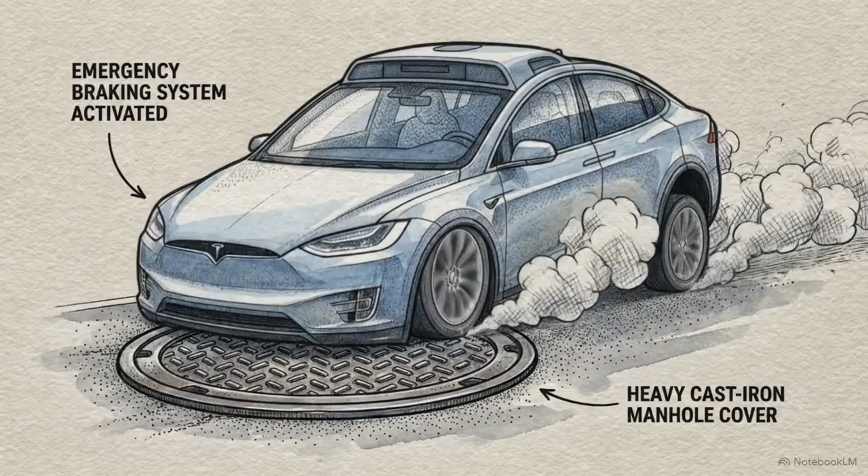An autonomous vehicle cruises down an empty road. Suddenly, it slams into an emergency stop. The detected threat? A perfectly flat, safe metal manhole cover.

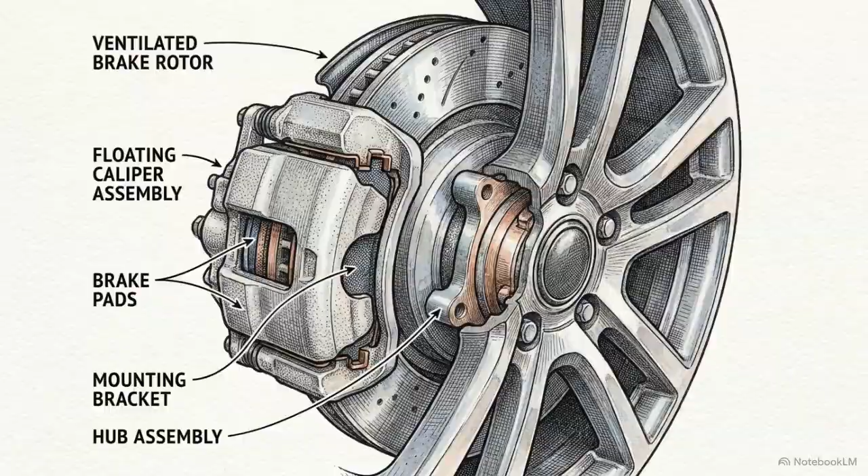To understand why this happens, we have to look past standard mechanical failures. The vehicle's brakes didn't lock up, the onboard computers didn't crash. The algorithms processing the sensor data and the software actuating the brakes executed their compiled instructions exactly as programmed. Even the radar sensor itself worked flawlessly, transmitting and receiving radio waves in strict accordance with the fundamental laws of physics.

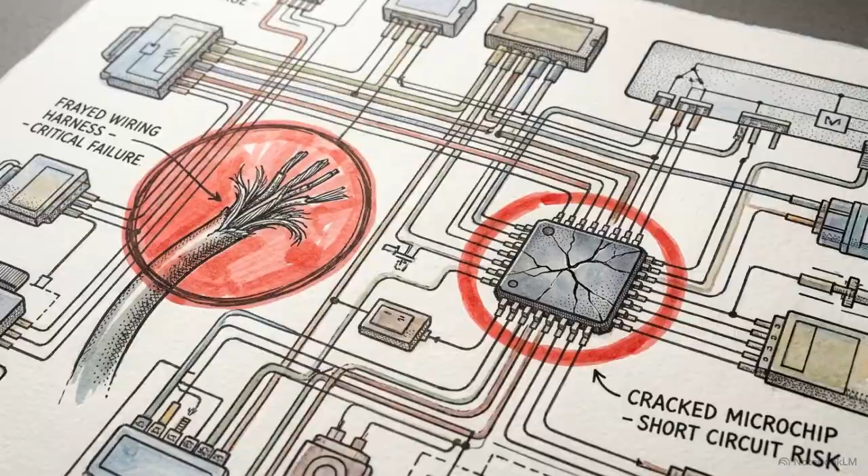For decades, automotive engineers relied on the ISO 26262 functional safety standard. That framework is designed to hunt down broken hardware, degraded wiring, and software bugs. But ISO 26262 cannot account for this manhole anomaly.

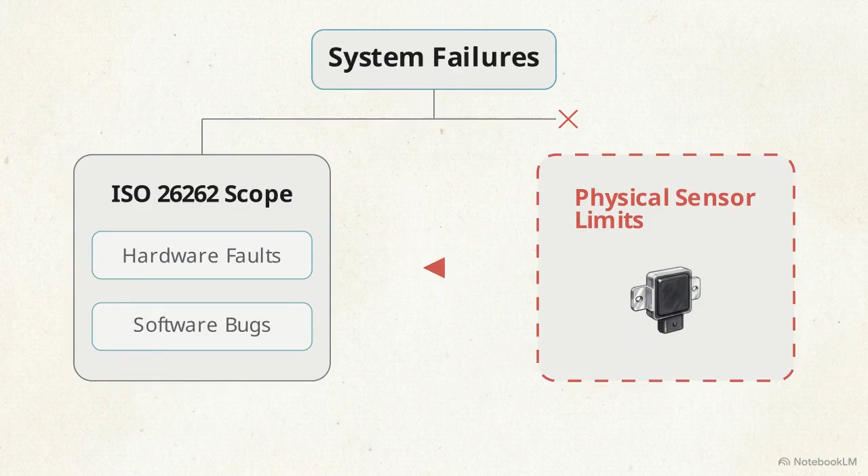It has no mechanism for handling a situation where a sensor operates perfectly, with zero faults, but is pushed to its absolute physical limits. Autonomous systems require us to confront a difficult reality. Flawless component execution can still yield hazardous behavior.

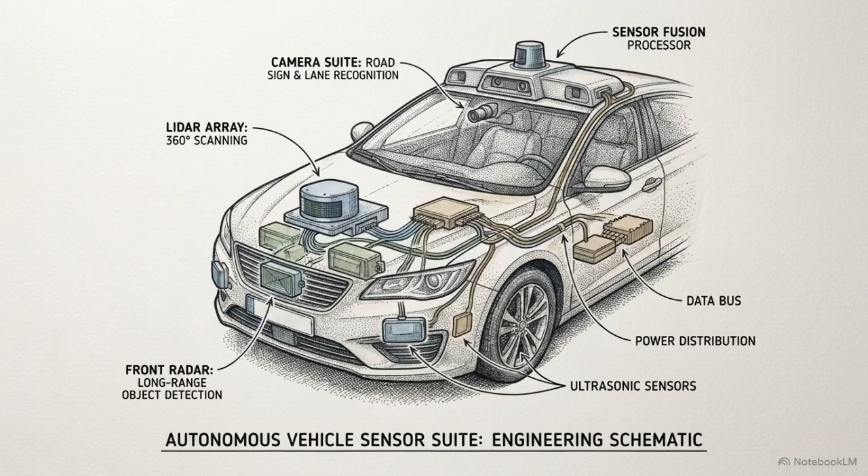This specific vulnerability is why the industry developed ISO 21448, commonly known as SOTIF, the safety of the intended functionality. It addresses hazards that occur without a localized component failure.

SOTIF operates on a specific mapping objective. It forces engineers to actively search the operational environment for unknown unsafe edge cases and shift them into the known safe domain. The mathematical bridge for this shift is Clause 7, specifically the acceptability evaluations in 7.4 and the documented work products in 7.5. These clauses translate abstract environmental variables, like heavy rain and metal manholes, into strictly quantitative validation parameters.

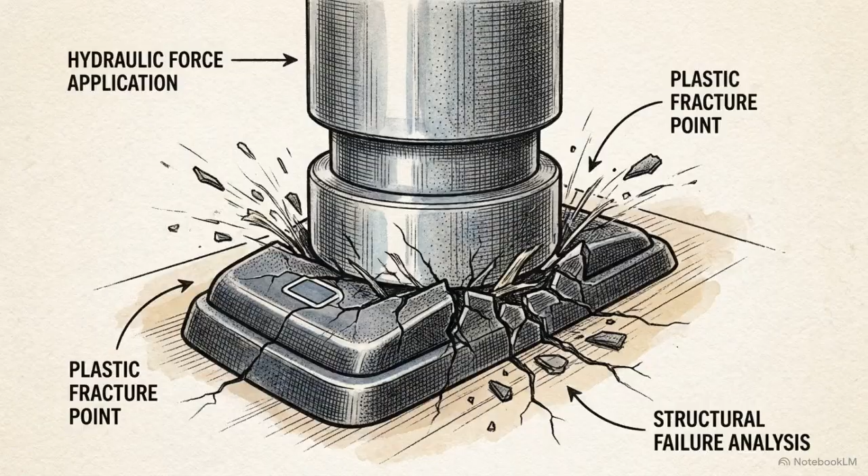While legacy workflows focus on how long a component will last before breaking, SOTIF requires engineers to predict exactly how a functioning system will misinterpret a complex environment.

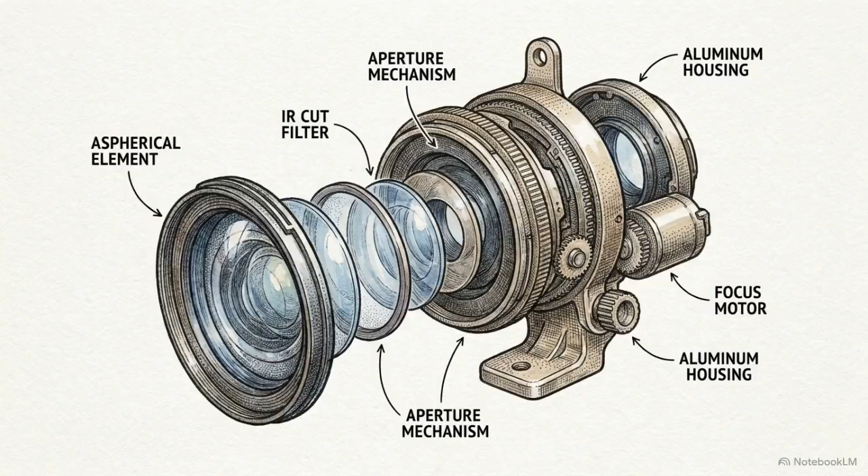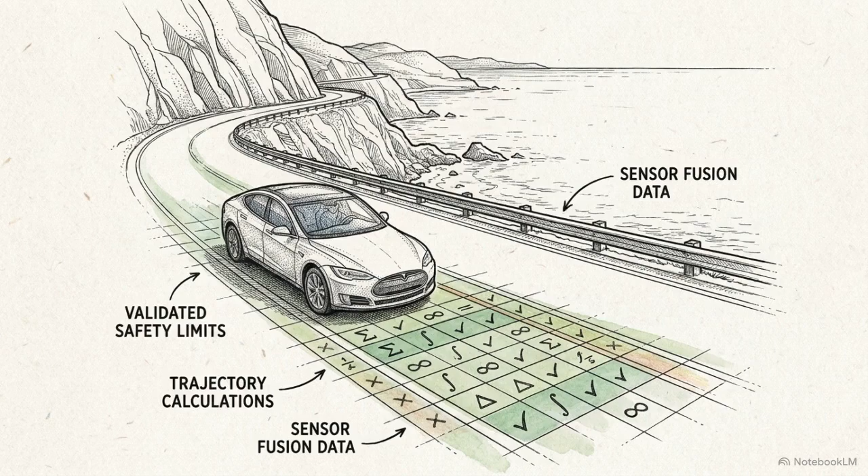The method is rigorous. You isolate the physical sensor limit, define the exact environmental trigger, and calculate the statistical probability. SOTIF uses mathematical logic to validate when inherent physical sensor limitations are safe enough for deployment.

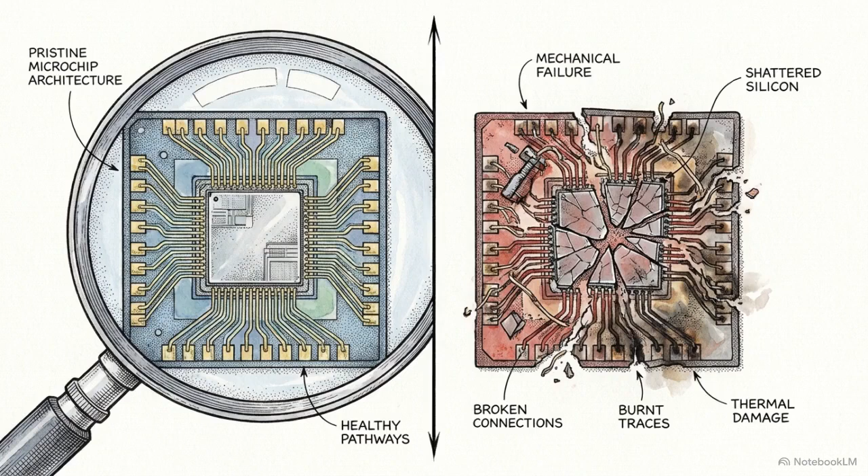Under Clause 7.3.4, SOTIF defines these physical limitations as functional insufficiencies. This is distinct from a software bug or hardware degradation. A functional insufficiency is simply an immutable limitation of the technology itself, strictly dictated by the laws of physics.

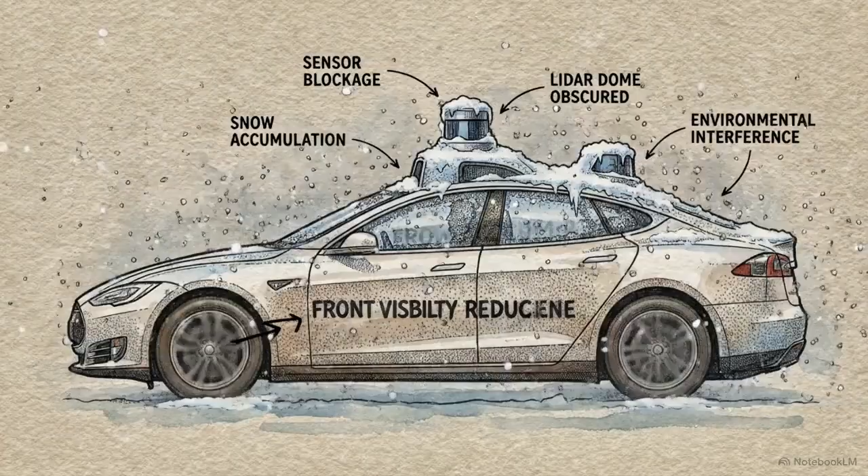Take the radar sensor as our anchor example. Radar is vulnerable to multipath propagation when interacting with metallic objects. The sensor emits a radio pulse, but instead of bouncing straight back, the wave reflects off the asphalt, strikes a metal manhole, deflects into the vehicle's undercarriage, and finally returns to the receiver.

Because the radar calculates distance based on the time of flight, this multi-bounce delay forces the algorithm to generate a false distance metric. The code does exactly what it's supposed to do, but it projects a solid ghost target directly in the vehicle's path. Every sensor modality has these physical constraints.

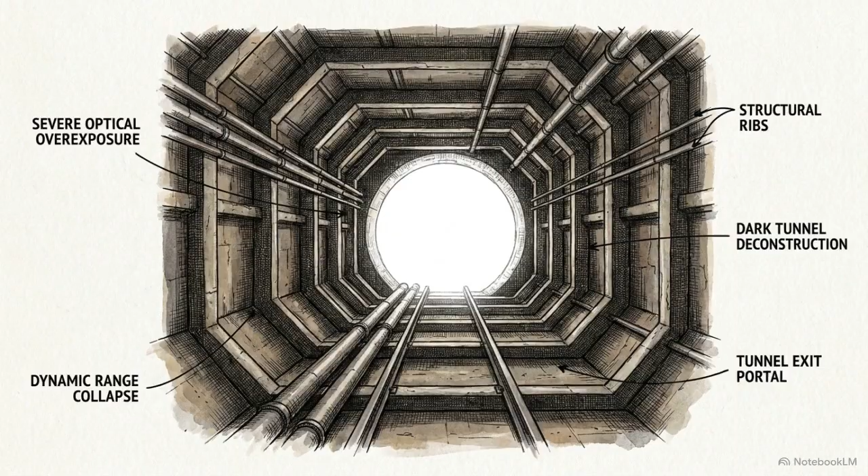While radar struggles with multipath reflections, a camera's optical dynamic range will collapse when transitioning from a dark tunnel into bright sunlight. But the insufficiency is only one half of the equation.

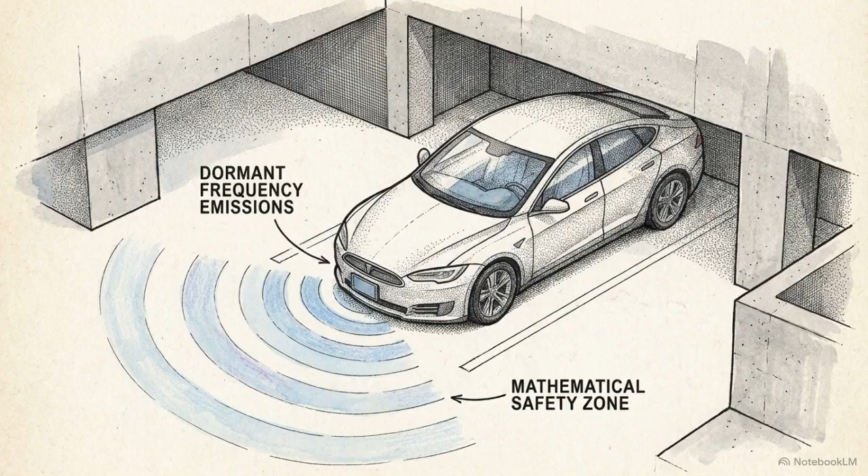The second variable is the triggering condition waiting out in the operational environment. A functional insufficiency is dormant and mathematically harmless until it is activated by its specific environmental trigger. Only when the radar's multipath vulnerability aligns with the physical layout of the flat metal manhole does the system generate the hazardous ghost braking event.

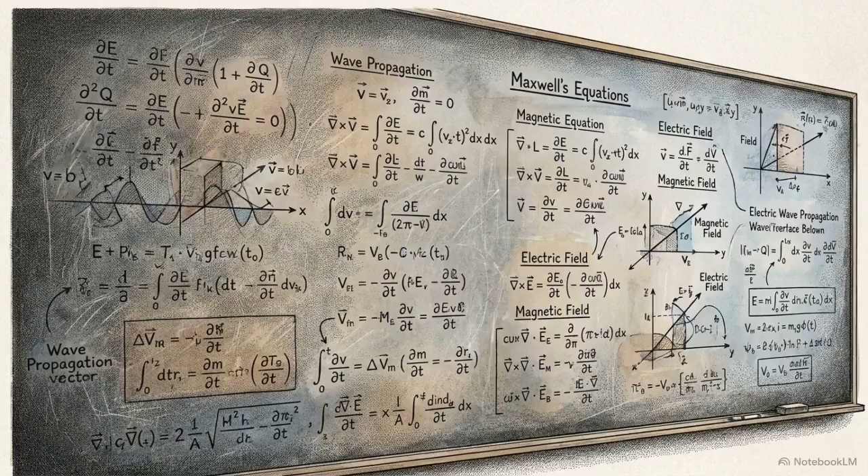Engineers cannot alter the laws of electromagnetic propagation. The physics dictates that these false positives are mathematically certain to occur over the life of a fleet.

Engineers measure this probability by calculating the residual risk. They evaluate three precise factors: the severity of the hazard, the controllability for the human driver, and the exposure, the frequency at which the vehicle will encounter that specific trigger in the real world.

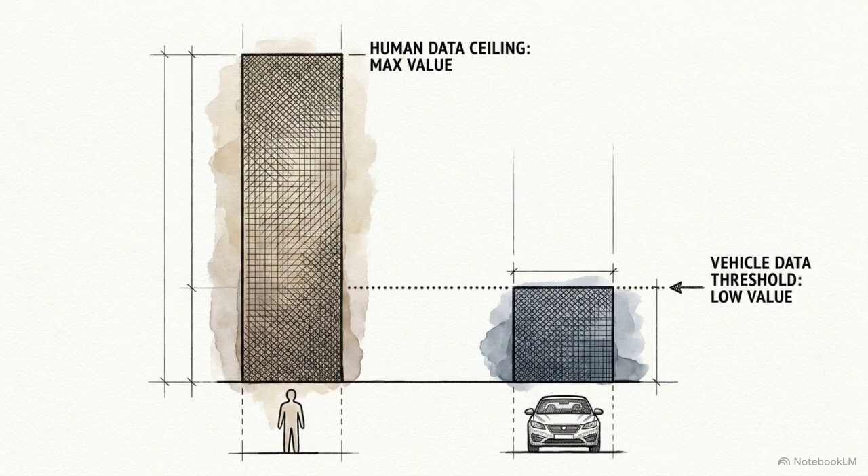To determine if that resulting risk calculation is acceptable, ISO 21448 utilizes global safety benchmarking frameworks. A primary metric is the minimum endogenous mortality, or MEM. MEM establishes a hard mathematical ceiling, demanding that fatalities induced by the technological system fall well below the natural mortality rate threshold of society, typically quantified as less than 10 to the negative fifth deaths per person per year.

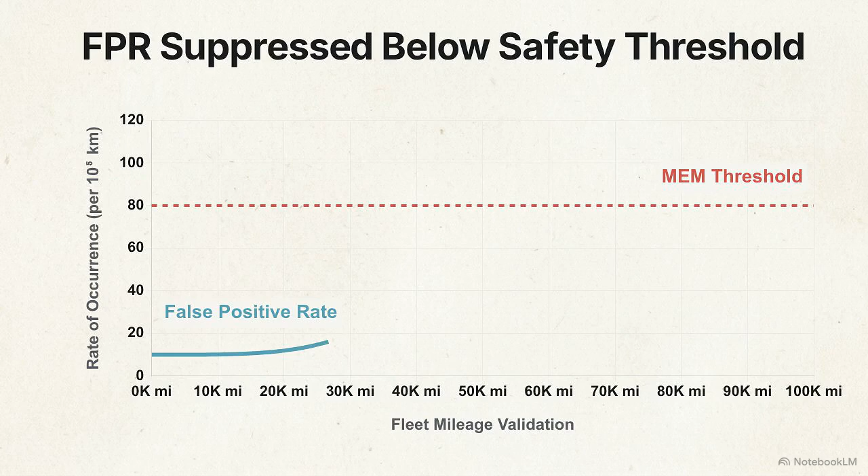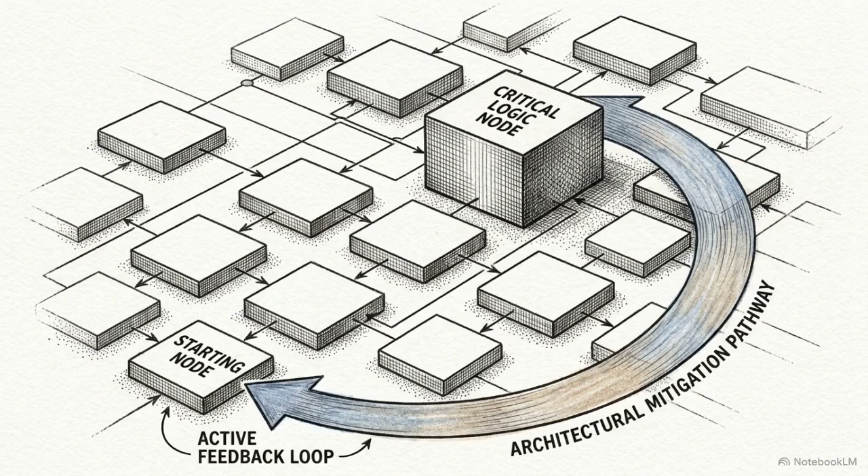The engineering objective is to suppress the false positive rate below the MEM threshold through rigorous statistical tracking. If the calculated residual risk of a manhole braking scenario exceeds that acceptable target, the system architecture itself must be changed, initiating the mitigation loop defined in Clause 8.

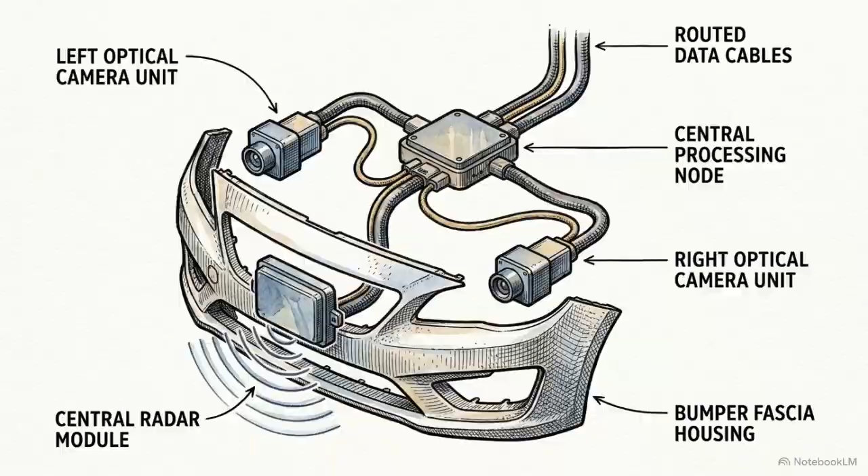Rather than attempting to redesign the radar physics, engineers implement architectural mitigations. They might mandate camera sensor fusion, requiring optical cross-verification of all radar targets before the braking code is allowed to actuate. Clause 7.4 transforms an unfixable physical error from an engineering dead end into a mathematically bounded risk variable.

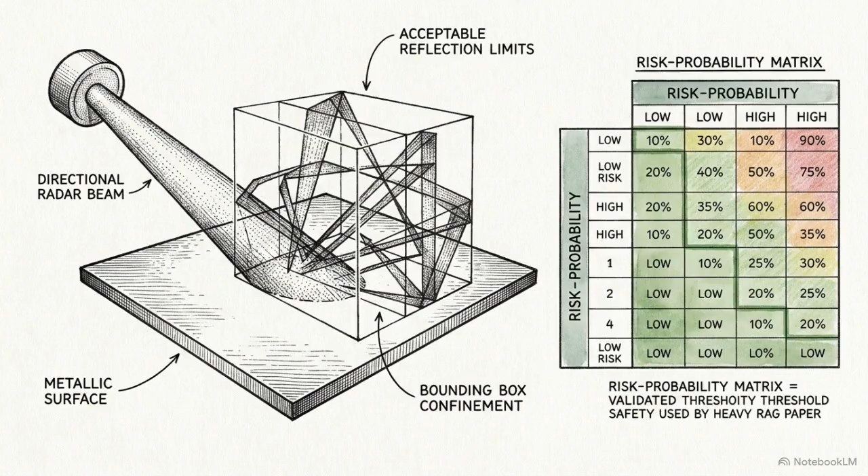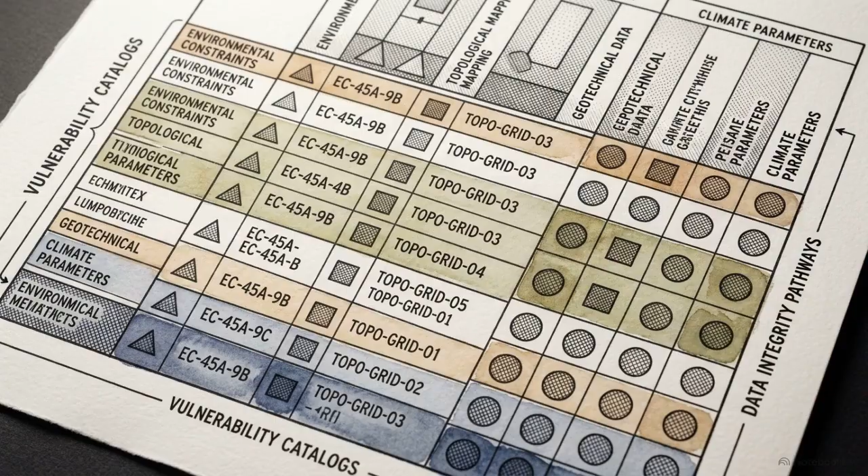The framework of Clause 7.4 is formalized into rigid, quantitative work product matrices in Clause 7.5. These matrices serve as proactive engineering specification sheets. This table, the Clause 7.5.1 database, catalogs every identified functional insufficiency directly alongside its environmental trigger. It records precise parameters, mapping out vulnerabilities like a metal sign positioned at a height of 4.5 meters at a distance of 50 meters. These exact environmental measurements define the physical boundaries of the vehicle's operational design domain.

Next is the Clause 7.5.2 Acceptability Evaluation Report. This document pairs each physical insufficiency with its required probabilistic safety threshold, linking a radar multipath anomaly to a target rate of less than 10 to the negative 7th per hour. That specific matrix row locks in the formal, quantitative pass or fail criteria for the entire autonomous platform.

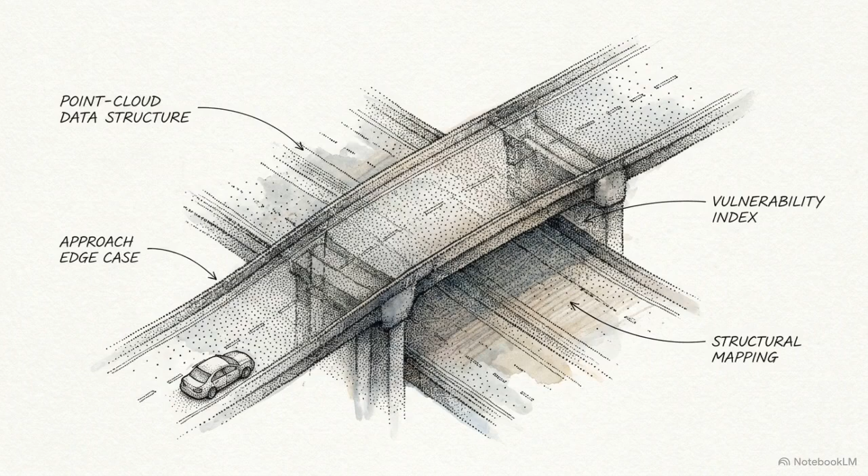These matrices map out exactly which specific edge cases the system is most vulnerable to in the real world. By doing so, they remove subjective engineering opinions regarding what feels safe, replacing them with statistical absolutes. Clause 7.5 matrices represent the exact mathematical threshold where a system transitions from an unacceptable danger to a road-legal product.

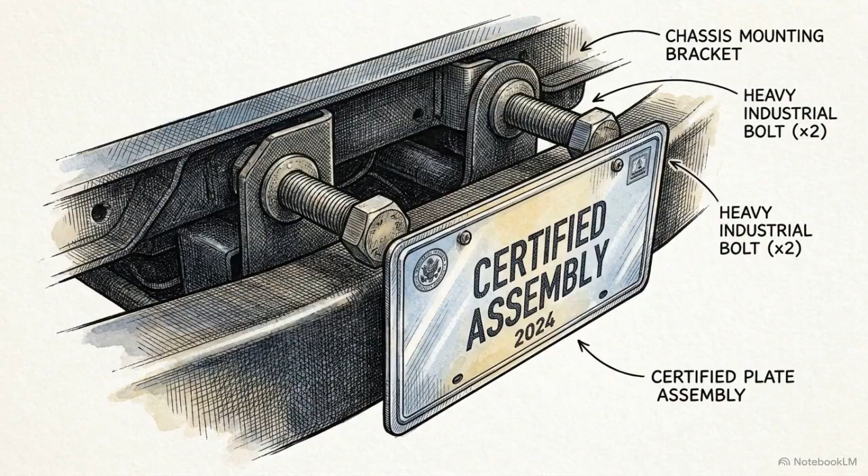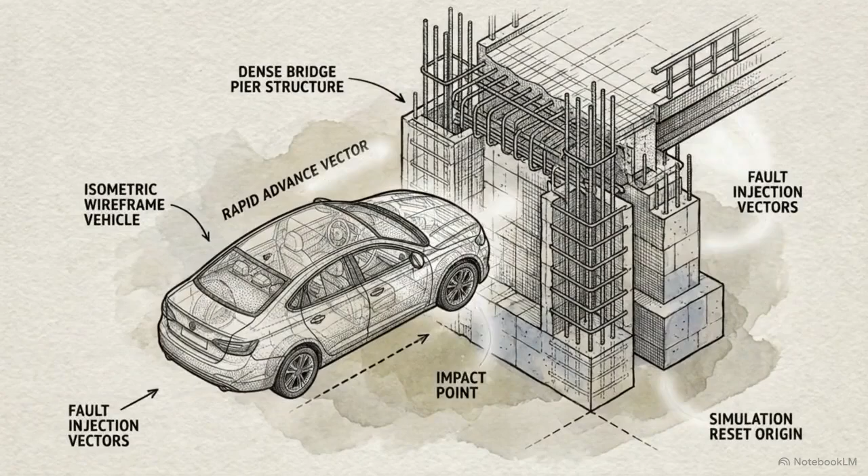Those specifications authored in Clause 7.5 directly command the system validation testing executed in Clause 10. The derived parameters from the matrices dictate precise fault injection vectors within high-speed software-in-the-loop environments. Here, the digital vehicle runs thousands of rapid iterations against specific triggers, like a wireframe bridge pier. Engineers use these simulations to continuously track the false positive rate, ensuring the system's reaction remains suppressed below that 10 to the negative 7 threshold.

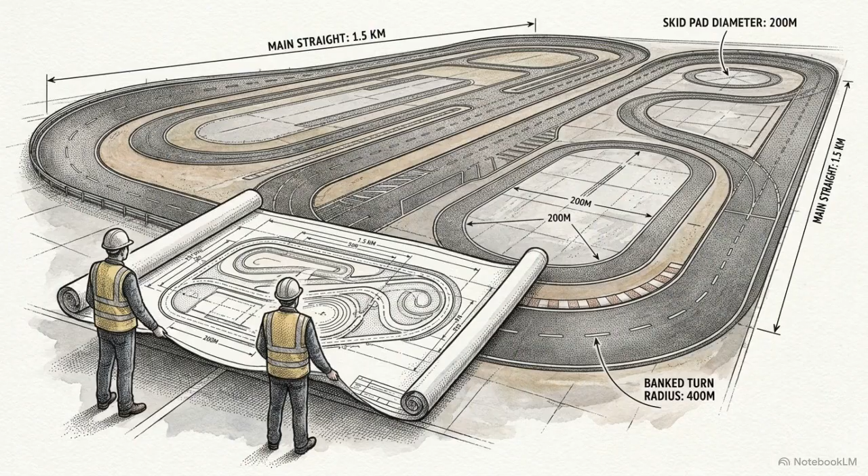Model-in-the-loop systems take the 7.5.1 matrix and use it to deliberately bombard the vehicle's perception algorithms with known, difficult triggering conditions. These same parameters translate directly out of the simulation and into the physical world, dictating the design of proving ground scenarios. The matrices tell the test track operators exactly what to build.

If the database flags a camera vulnerability, engineers might deploy an artificial rain system that produces exactly 20 millimeters per hour of precipitation over a specific target. Both the physical and simulated verification stages are entirely reliant on the mathematical precision of the targets generated in Clause 7. Validation is rarely clean on the first pass.

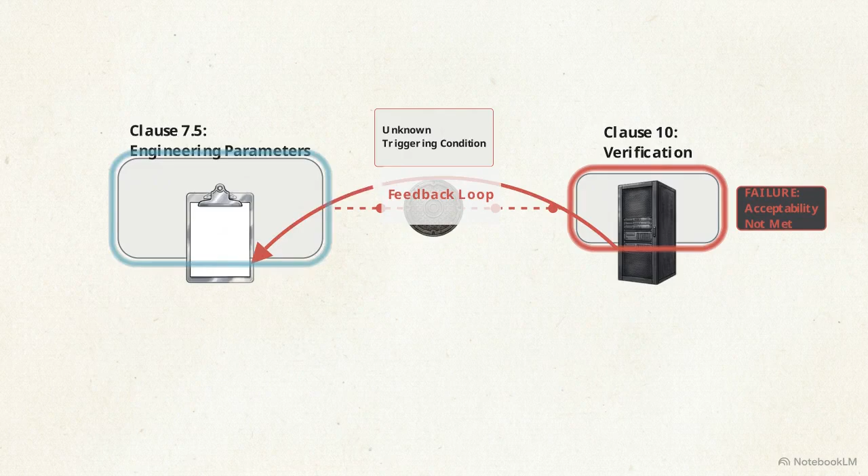When a real-world or simulated test fails to meet the acceptability criteria, SOTIF provides a strict feedback loop. A verification failure indicates the discovery of a previously unknown triggering condition, one that the current system architecture cannot yet handle. This failure routes the engineering team back to the beginning of Clause 7. They update the parameters and initiate new Clause 8 hardware and software mitigations to address the gap.

The SOTIF 7.5 work products represent a living statistical model of the system's operational reality, evolving with every mile driven. Building an autonomous sensor that never makes a mistake is an engineering impossibility. Physics will always intervene. True safety in autonomous driving isn't achieved by eliminating physical limitations. It is achieved through the rigorous, mathematical bounding of those limits.